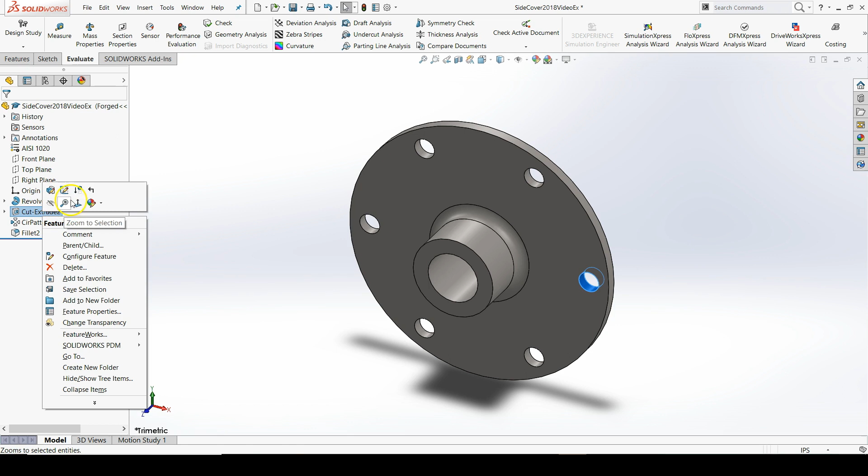And then finally, with our forged configuration active, we need to suppress the hole pattern, which in mine here it's cut extrude 2. And remember, if we suppress this, it'll suppress all its child features as well, which is the circular pattern itself. And then we also need to change our 0.625 inner bore diameter. We need to change that to 0.6.

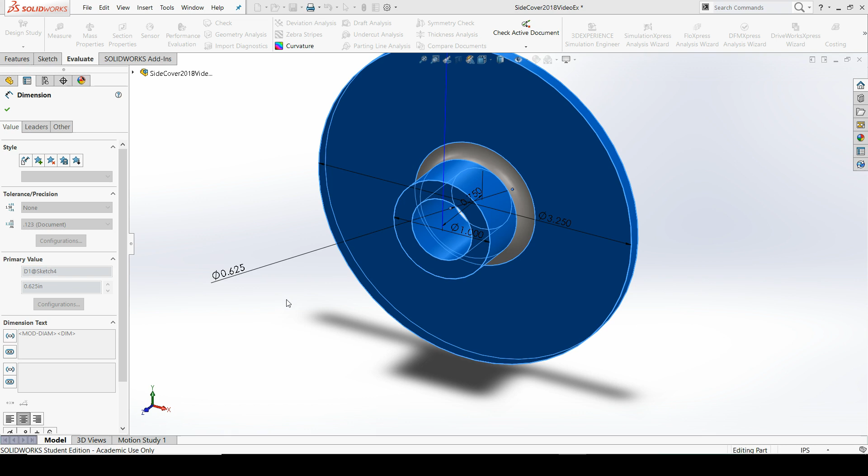So before you change the value, over to the left, make sure you click this configuration, put in 0.6, rebuild. Let's make sure that our configuration changes as appropriate. Yep. Alright, so now we can go to make a new drawing. New, make drawing from part assembly.

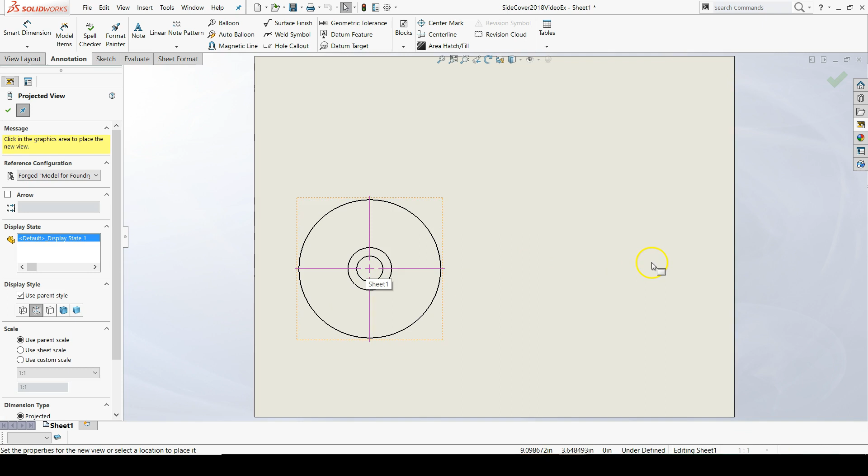And on this one I think because it's a small and simple part, the A size paper is going to be okay, and we'll continue not using the sheet format, so uncheck display sheet format, and then bring a front view on to the page, and then a right view. Don't do the isometric view just yet. We'll do that more near the end of this project.

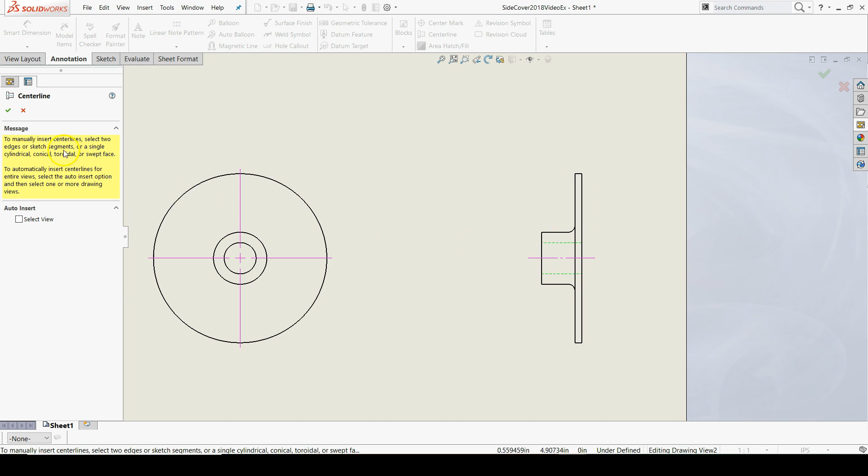And then we need to add any missing center lines by using the center line tool on the annotation tab of the command manager. Click your two lines that you want to produce a center line with. Click the OK button in the property manager, and then we can import our model items, our dimensions from the model, by going to the annotation tab and clicking on model items.

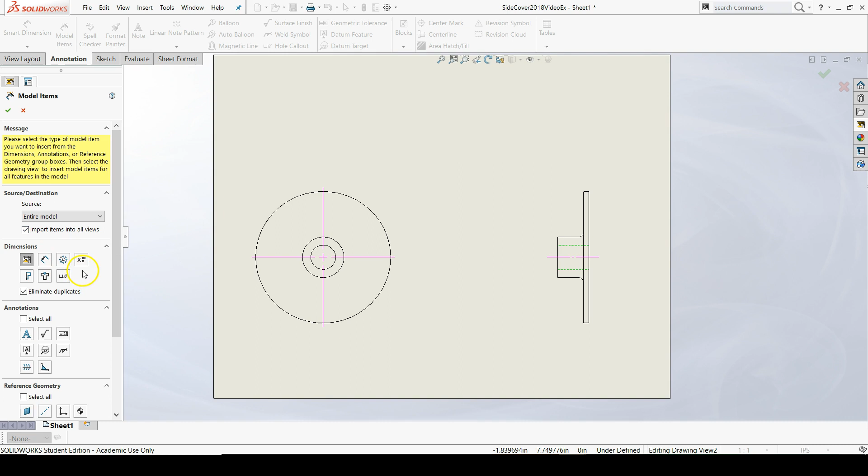For the source, it's going to be the entire model because we want dimensions from the entire model to come up onto this thing, and we do want tolerance dimensions, hole callouts, and hole wizard locations. That's all we need. Make sure that eliminate duplicates is checked and import items into all views is checked. Click the green check mark.

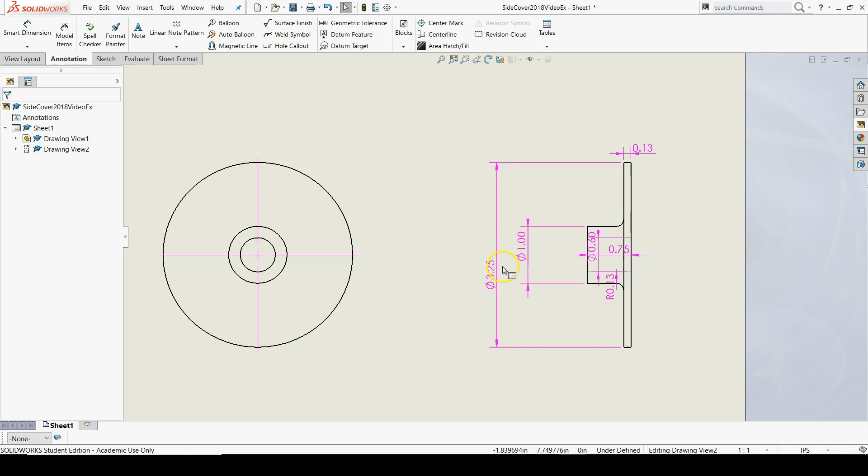And then I'll let you all practice what you know by arranging the dimensions. A few things to remember is that if you hold down shift and then left click drag, you can move dimensions to different views. You can change the display state of diameter dimensions by going to the property manager of the dimension and then clicking on this guy. Come on. You can also right click on the dimension, go to display options and say display as diameter.

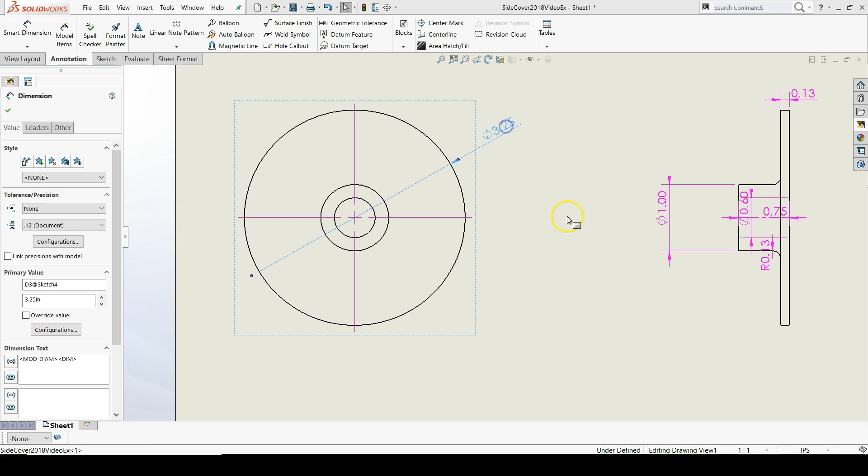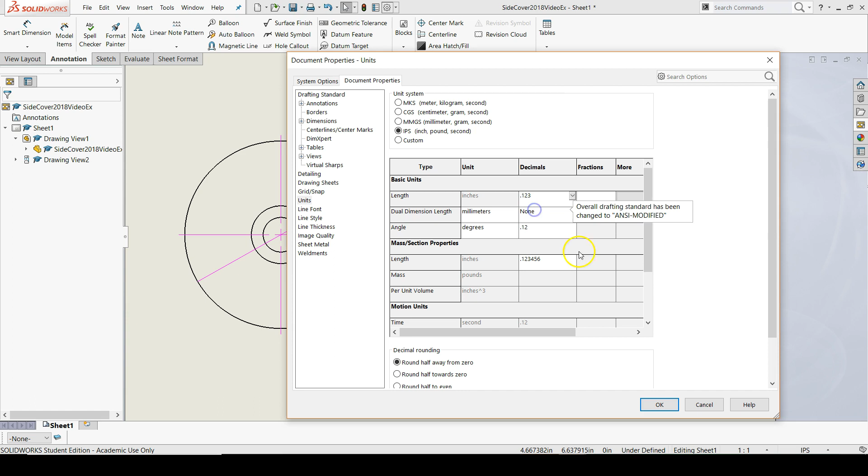And right now I'm seeing that I'm in the IPS standard, so make sure your units and your drafting standard are in ANSI. Mine look like they're in ANSI, but my units are a little weird. Sometimes you have to go back and make sure once you've changed a unit property, make sure it's still on ANSI.

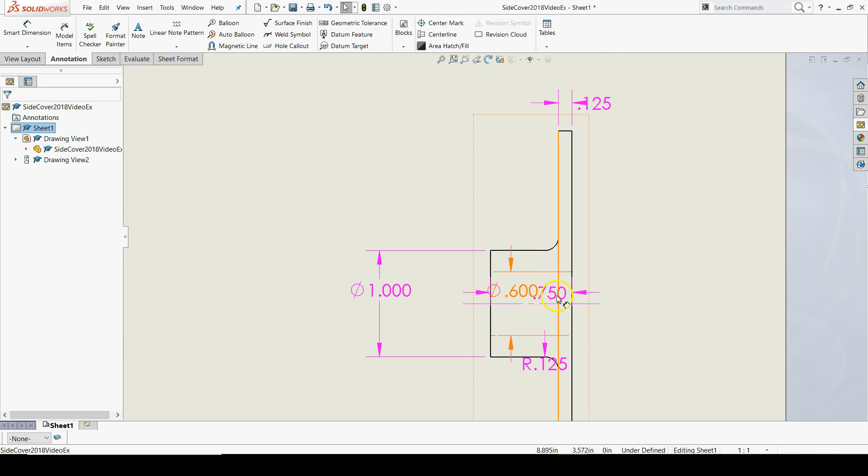There we go. Alright. One more thing I want you to remember, that you can hide extension lines by right clicking near the extension line and saying hide extension line. And you can make a new page by copying your first sheet, go to copy, and then pasting in the left feature manager for the drawing. Say after selected sheet. So now I have sheet 1, 2, as we can see down here.

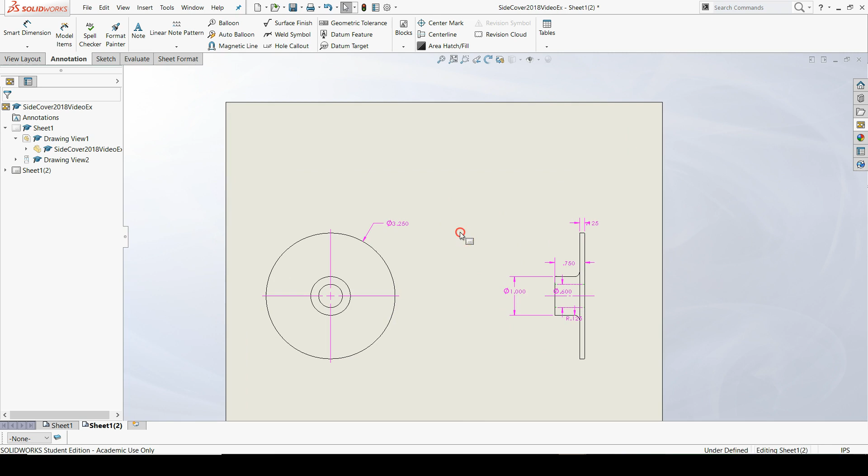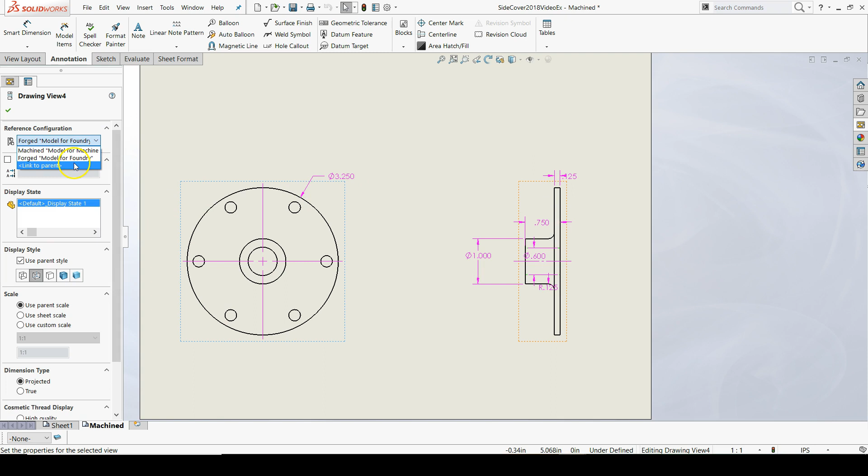I can change the name by going to properties. Let's call this the machined configuration. I can change the configuration of my drawing by clicking it inside the front view, the parent view, going to reference configuration, going to machined, and now this is in the machined configuration. To make sure the right view is in the machined configuration, I can say link to parent. There we go. But I'm actually going to delete the right view to make an aligned section.

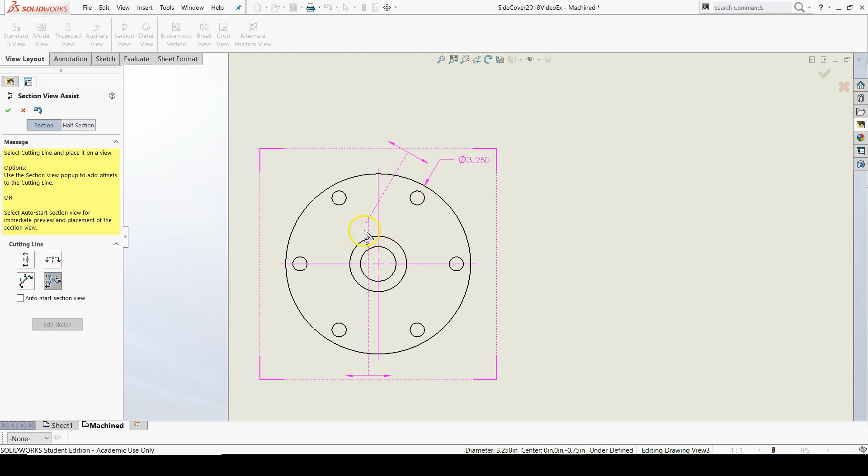So to make an aligned section, it's very similar to a normal section. You go to view layout and then section view, and then you click on this guy right here. If you hover over it long enough, it'll say aligned, and you can even see the clicking pattern. First you'll click the center of the aligned section, next you'll click the point where you want the aligned section to go through, and then third you click the other point where you want the aligned section to go through on the other line.

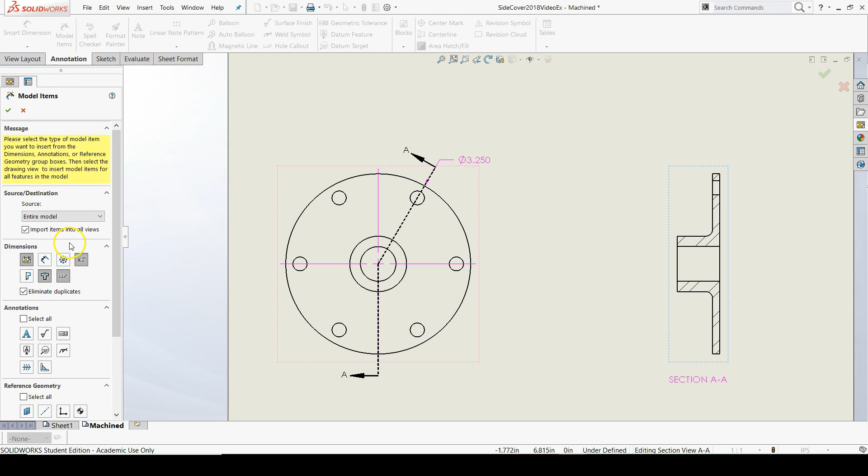So here I can see my aligned section in preview, click the center of the top right hole, and then make the bottom part of the cutting plane line vertical, hit the green check mark, then bring it over. And now I can import missing model items, and then start dimensioning this thing once I get center lines in, of course. Whoops.

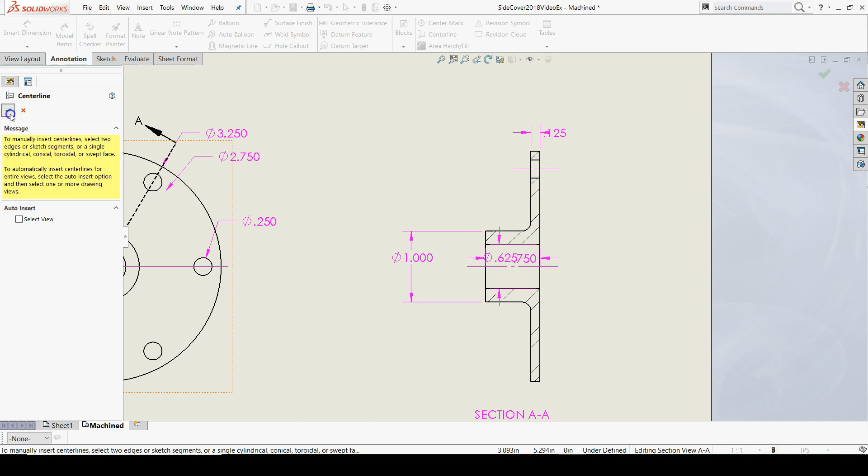And one final thing, I don't want to belabor this video, is the general notes section. You can go to note in the annotation tab of the command manager, type general notes, put part number, material, units, this is inches, and unless otherwise specified.

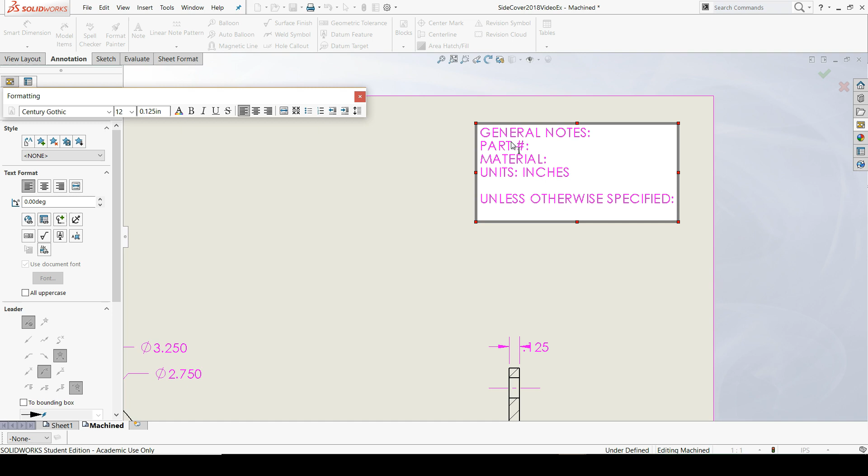Let's use the same tolerance that we used on our housing on this side cover, which was the machine tolerance was plus or minus 0.005, and the forge tolerance was plus or minus 25 thousandths or 0.025.

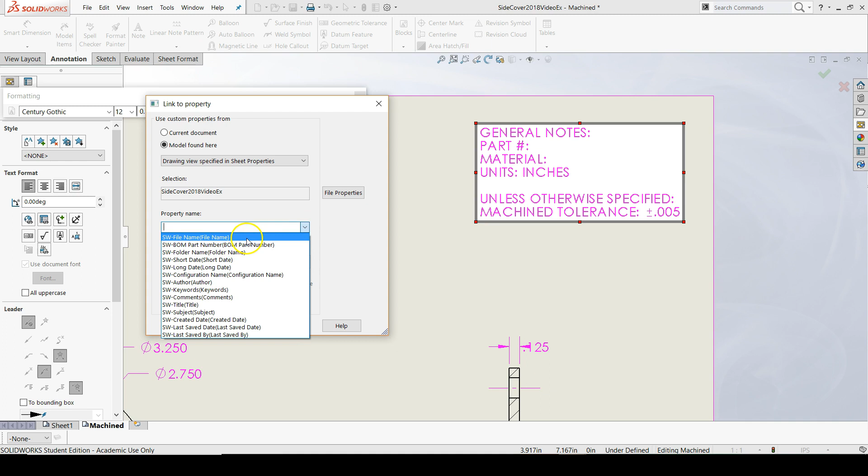To input custom properties, you go to the custom properties button, and you click model found here, property name for the part number, it's going to be the file name, and for the material we actually have to go back into the model. Once we get out of the note, I just pressed escape, so go back to the model and then add a custom property here, up here in file properties at the top near the menu bar.

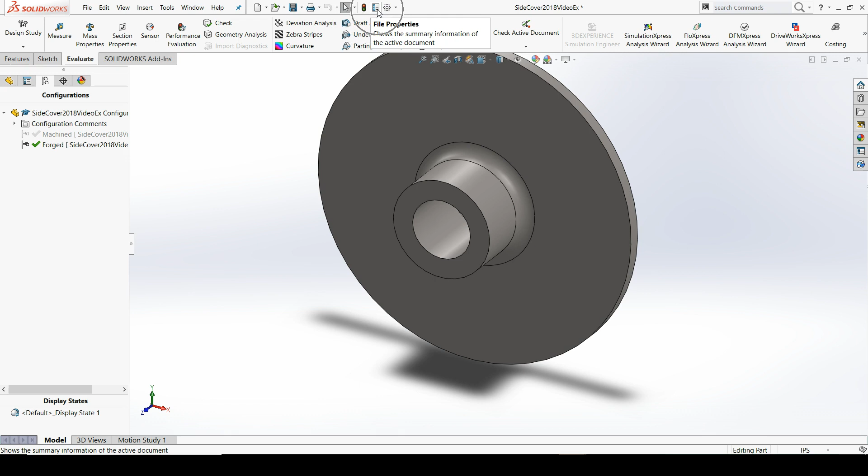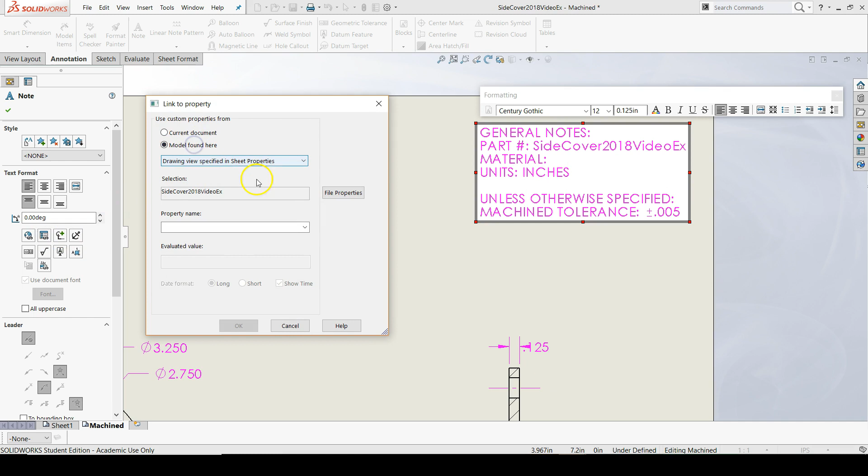On the custom tab, click material and the property name, and then under the value expression click material. That's pretty easy, right? And then now back here I can input a custom property from the model, material. That's all I'm going to go over. I'll leave the rest to you.